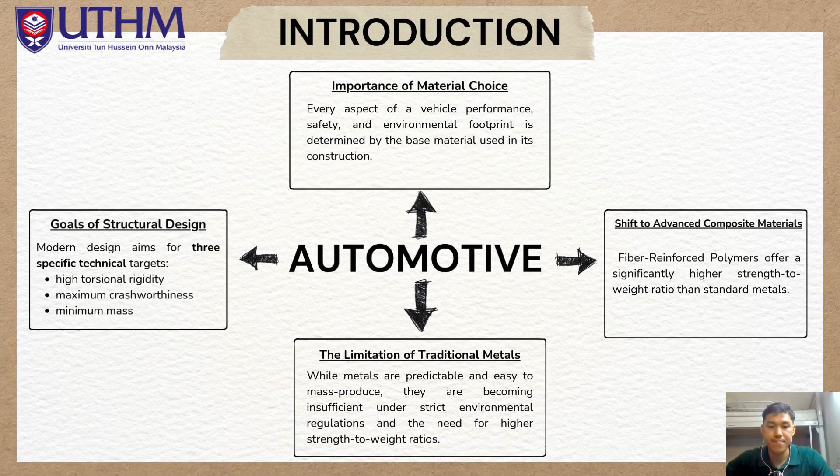One of the problems in today's automotive industry is the constraints of the traditional metals used to produce vehicles. Most vehicles today are made using traditional stamping of steel and aluminum. While these are easy to mass produce, their high density is a major problem. We are reaching a point where metallic materials can no longer help the industry comply with strict new carbon emission laws because they make vehicles unnecessarily heavy, leading to higher energy consumption as well as operational costs.

Next, for the EV challenge, the stakes are even higher. Conventional materials are simply no longer adequate in an EV or electric vehicle. Every kilogram of weight lost is directly proportional to the battery range. So to make EVs viable for the mass market, we must move away from heavy alloys and toward lighter alternatives.

For the technical barrier, composites like carbon fiber and glass fiber are anisotropic, which means that their strength changes based on direction. This makes them harder to simulate and can lead to dangerous failures like delamination or brittle fracture. And last but not least are the manufacturing and cost hurdles. Beyond the engineering challenges, the raw materials are expensive, and the long manufacturing cycle times make them even more difficult to use in high volume production.

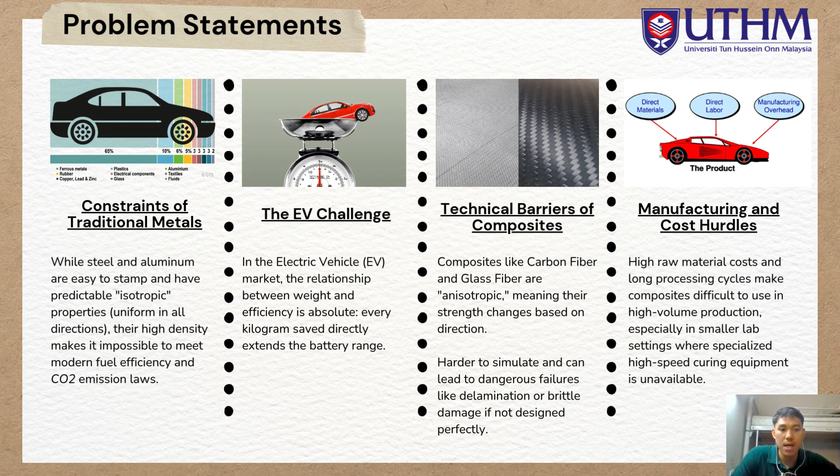For this project, the first objective is to choose and analyze the appropriate lightweight composite material; we have chosen carbon fiber reinforced polymers as well as glass fiber reinforced polymers according to their strength to weight ratio and their application in the automotive structure. Next is to examine the production steps of the chosen automotive composites via resin transfer molding, or RTM, to ascertain the production of intricate geometries.

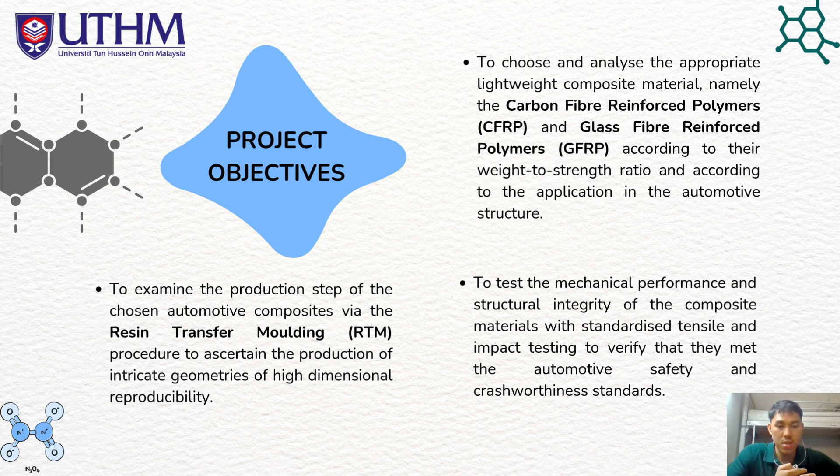And last but not least is to test the mechanical performance and structural integrity of the composite material we have chosen, with standardized tensile and impact testing to verify that the composites meet automotive safety and crashworthiness standards.

The scope of our material selection is very specific. We are focusing on carbon fiber and glass fiber reinforced polymers. For the matrix, the glue that holds the fibers, we are using epoxy and polypropylene as the major matrix materials. This allows us to compare how different reinforcements behave with different resin systems. Next, for manufacturing, we have restricted our scope to the resin transfer molding method.

We are not just going to make flat plates, we are focusing more on the geometry of critical automotive parts like bumper beams and B pillars. We have set a thickness range of 3 mm to 10 mm to ensure that we maintain the perfect balance between weight reduction and structural strength.

And last but not least, our mechanical verification is governed by international standards. We are using ASTM D3039 for tensile testing to find the ultimate strength and Young's modulus, and ASTM D6110 for Charpy impact testing. This last part is crucial because it will tell us the energy absorption capacity, which is essential for how much impact the part can take before it fails.

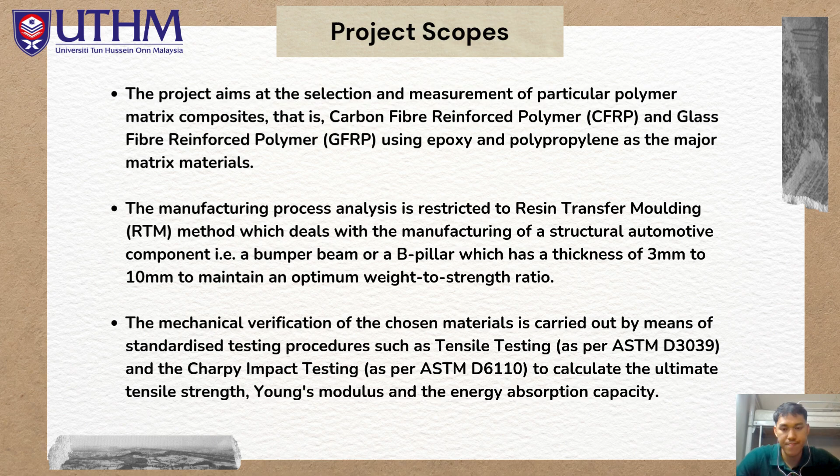Okay, so for the first part, our literature review, as you can see, the first topic is automotive lightweighting and composites. From our literature review, first, lightweighting is a key strategy in modern automotive engineering to improve fuel efficiency and reduce environmental impact. This is especially important for electric vehicles or EVs, where reducing weight directly increases battery range. Instead of traditional metal, composite materials are increasingly used because they can significantly reduce vehicle weight while maintaining structural performance.

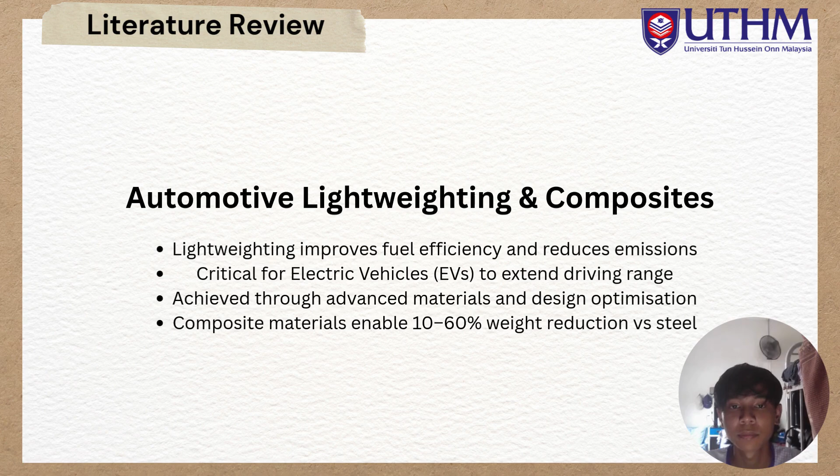The second point is FRP composites, which means CFRP and GFRP. FRP composites consist of strong fibers embedded in a polymer matrix. Carbon fiber composites provide excellent mechanical performance but are expensive and much more difficult to recycle. Glass fiber composites, however, offer a better balance between performance and cost, making them more practical for large-scale automotive applications.

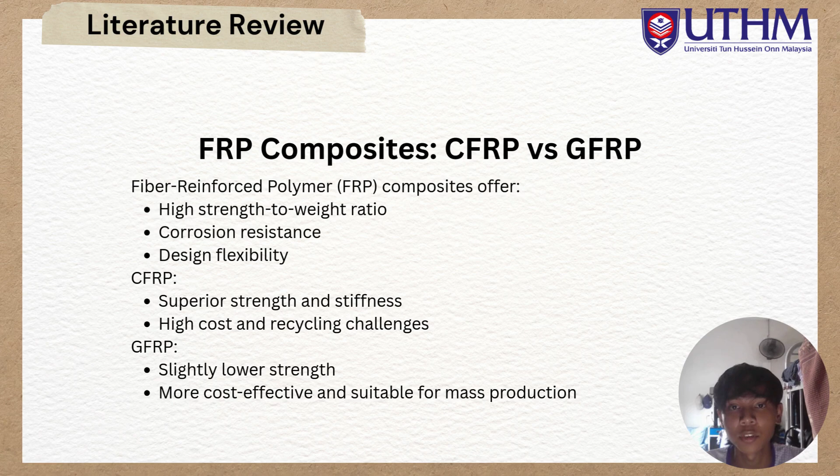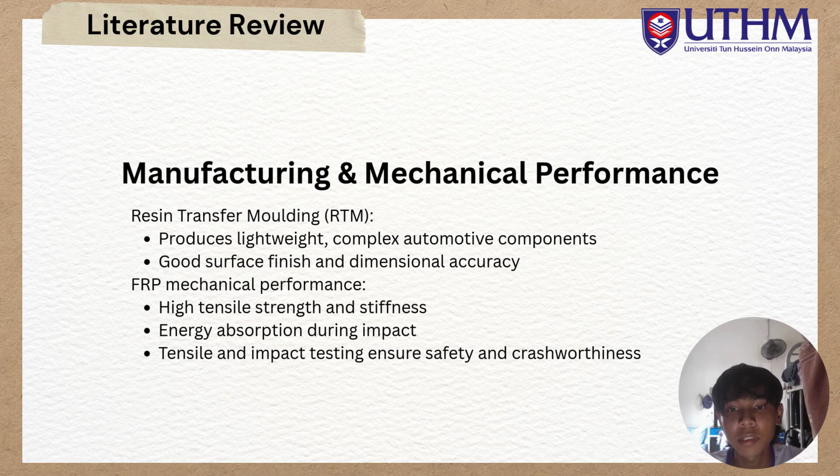Last but not least, point 3, manufacturing and mechanical performance. Resin transfer molding or RTM is a key manufacturing method for automotive composites because it allows high quality parts with complex geometries. FRP composites show high strength and good impact energy absorption, which is essential for crash safety. Standard tensile and impact tests are used to confirm that these materials meet automotive performance requirements.

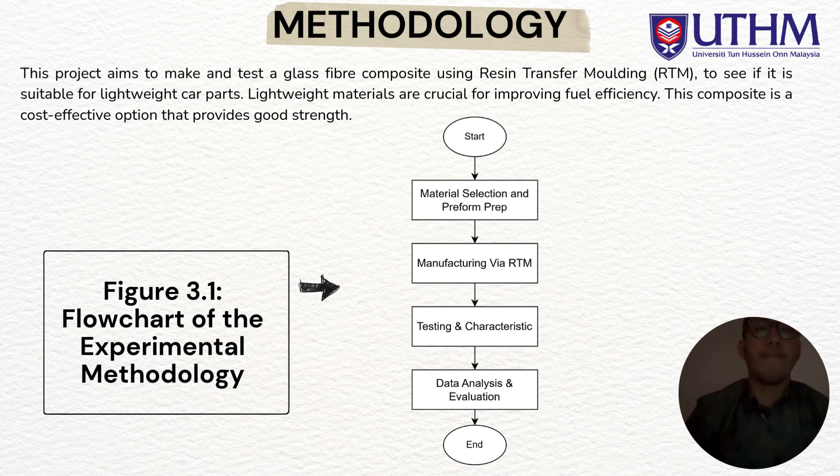From the picture you can see figure 3.1, which I took from the project report, the flowchart of the experimental methodology. It starts with material selection and preform prep, goes to manufacturing via RTM, testing and characterization, and also data analysis and evaluation.

Next stage, we go to the material selection and specimen selection. You can see a schematic of the specimen there and the electrode setting. B is a schematic of the VARTM process, and C is a photograph of the experimental setup. So we will start with the material selection.

We have 20 plies of carbon fiber stacked, each measuring 500 mm in width, 1000 mm in length, and 0.25 mm in thickness. The fibers in both the warp and weft directions were T300B 3K plain woven carbon fibers. The numbers of warp and weft threads were 5.1 ends per cm and 5.1 picks per cm respectively. And the epoxy resin had a viscosity of 450 mPa·s at 25 Celsius and specific gravity of 1.11 g/ml at 25 Celsius in the uncured state.

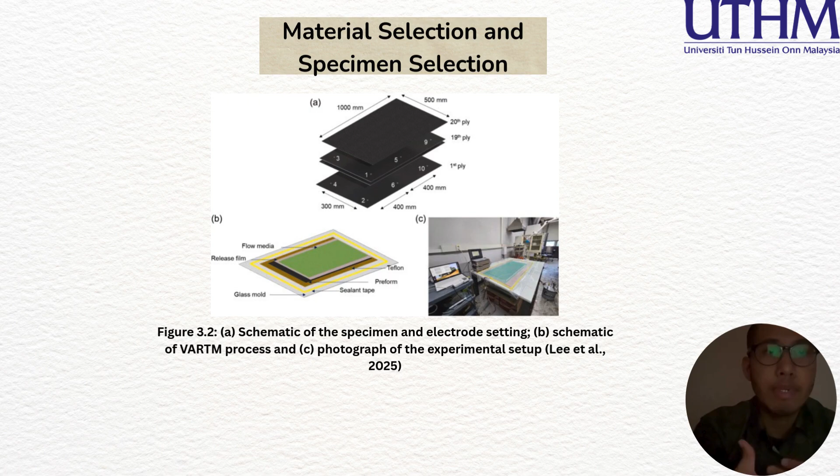So there's layer by layer. We can see the flow media, and it also has a release film, Teflon, preform, and sealant tape, and the important thing is the glass mold to cover each layer of the specimen and electrode. We continue to the next slide.

There are 4 stages. The first stage of the characterization consists of qualitative observation during the compounding and molding process for each glass fiber type. Among the points of comparison is the assessment of sheet density and wetting in charge, as well as non-destructive analysis of any imperfection observed after molding.

Next, the second stage includes micro scale testing to quantify differences in single fiber tensile properties, surface morphology and single fiber interfacial shear strength that might result from chemical sizing packages in different classes of the products.

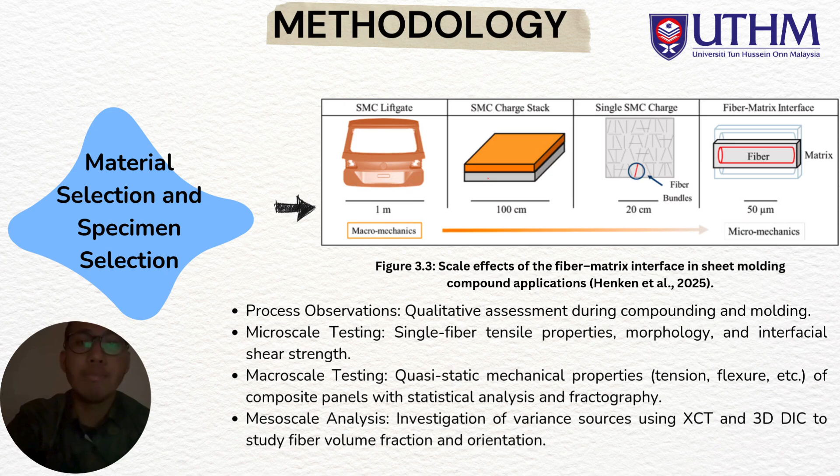Okay, we go for the last stage, which is the fourth stage: investigate mesoscale sources of variance related to localized effects of fiber volume fraction and fiber orientation distribution as inferred from XCT and 3D DIC. If you refer to the picture, we have the SMC lift gate at 1 meter, and we go to the SMC charge stack at 100 cm and a single SMC charge at 20 cm, which has fiber bundles inside the layer. And then lastly is the fiber-matrix interface, which must be at 50 micrometers.

This is the last part of the methodology. We have the mechanical testing protocol. The figures show the experimental mechanical testing setup for tensile, flexural, short beam strength, in-plane shear, and compression based on ASTM standards. Each has its own standard, so we need to follow what they require when doing the mechanical testing.

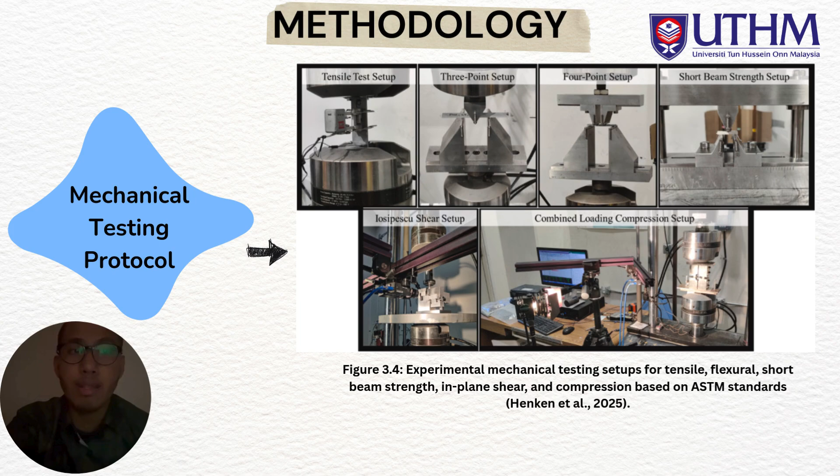We have low velocity impact also. We have flexural testing, which is focused on 3-point bend. Flexural properties will be determined per ASTM D790 to simulate bending loads common in panels. Tests will be conducted at a span-to-depth ratio of 32:1 at a crosshead speed of 1 mm per minute.

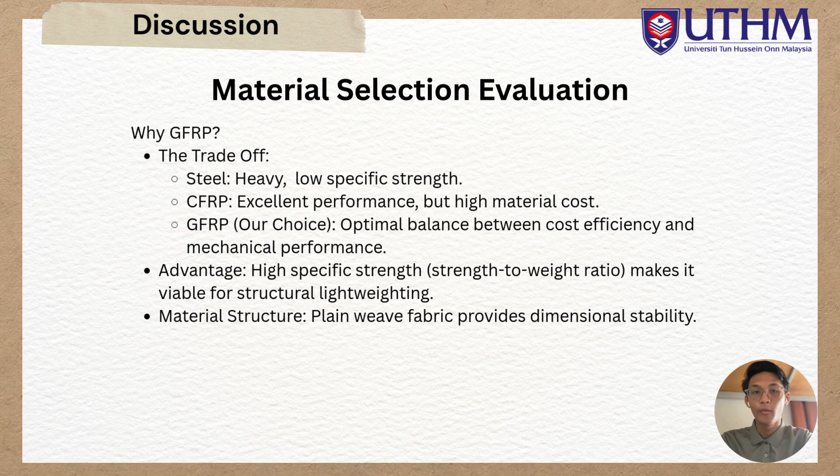Now moving to section 4.0, I will discuss the findings of our project, focusing on material selection, mechanical performance and manufacturing feasibility. First, let's discuss why we chose glass fiber reinforced polymer, GFRP. In the automotive industry, we always face a trade-off. Traditionally, steel is cheap but very heavy. On the other hand, carbon fiber CFRP is extremely light and strong, but the material cost is too high for mass market cars. So our study found that GFRP offers the optimal balance. Although its absolute strength is lower than steel, its specific strength, which is the strength-to-weight ratio, is excellent. This makes it a viable candidate for structural parts where reducing weight is critical.

Now regarding the manufacturing process, we use resin transfer molding RTM because it provides the high surface quality needed for automotive body panels. The most critical factor we analyzed was resin viscosity. We use an epoxy with a low viscosity of under 500 cP. Why is this important? Because our woven fiber preform is very dense. The resin needs to be thin enough to flow into every gap. If the viscosity is too high, we get dry spots or voids, which weaken the part. Therefore, controlling the flow is the key to structural integrity.

Now, regarding the manufacturing process, we use resin transfer molding (RTM) because it provides the high surface quality needed for automotive body panels. The most critical factor we analyzed was resin viscosity. We use an epoxy with a low viscosity of under 500 cP. Why is this important? Because our woven fiber preform is very dense. The resin needs to be thin enough to flow into every gap. If the viscosity is too high, we get dry spots or voids, which weaken the part. Therefore, controlling the flow is the key to structural integrity.